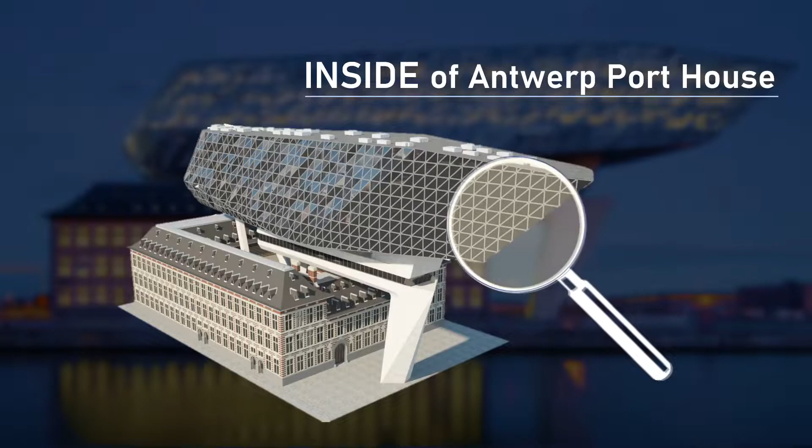In today's video, we will take a closer look inside Antwerp Port House. We will understand what is inside the existing building and the newly added structure that floats above, and also how the existing building was reformed to its current form.

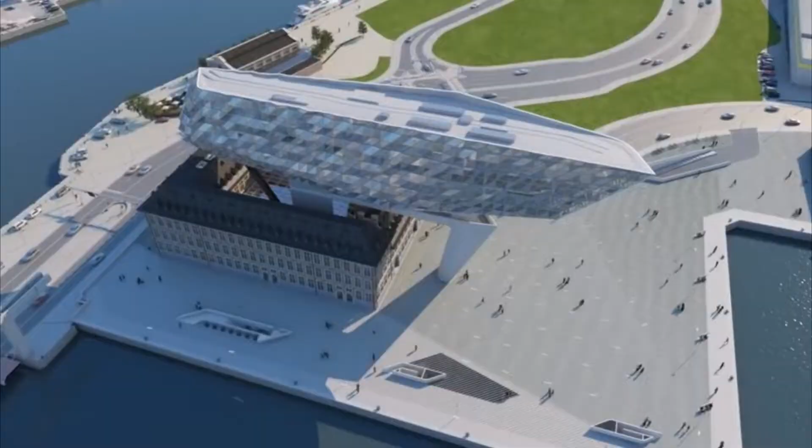Before we go over the interior of Antwerp Port House, let's have a short look at its aesthetic view. We were lucky enough to find a resource that shows great detail of the interior design of Antwerp Port House.

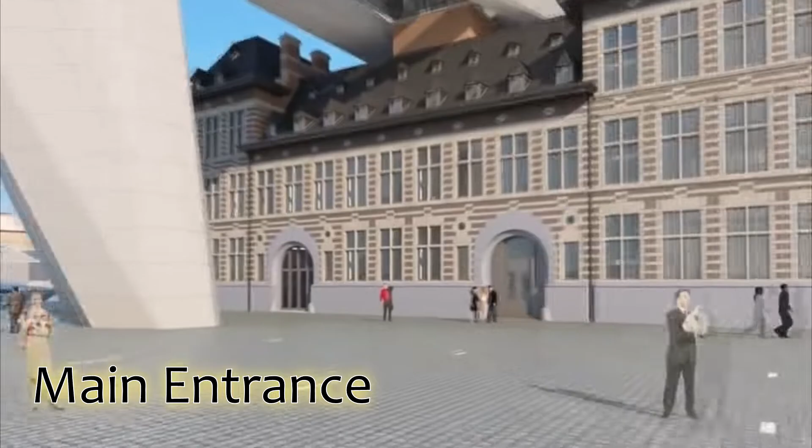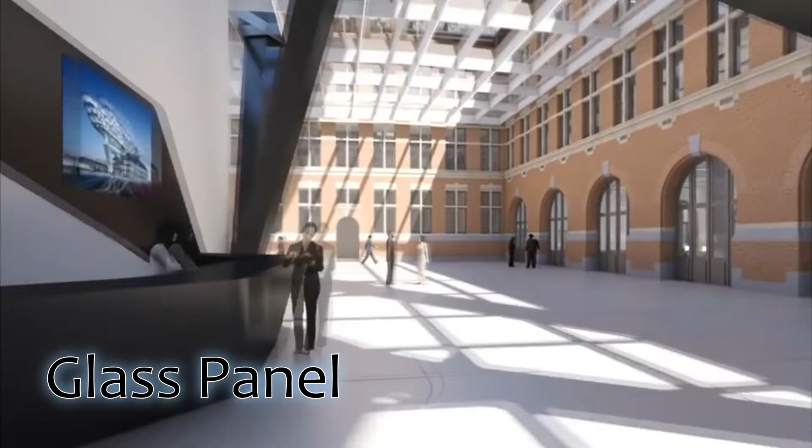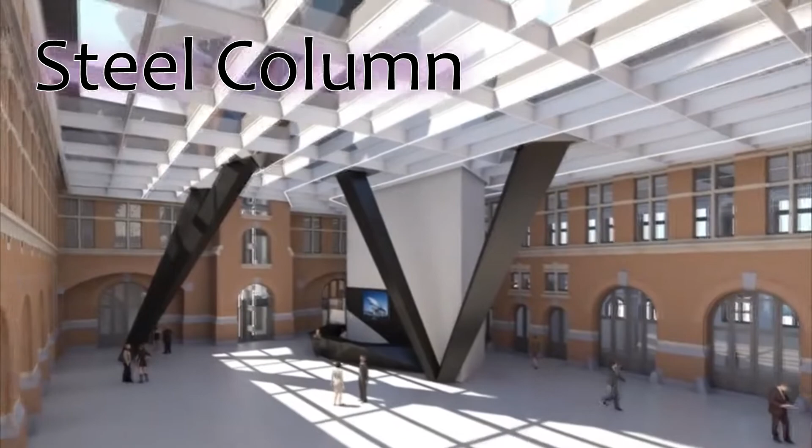As we enter the main entrance of the building, we are looking at the main courtyard that used to be open to the outside atmosphere. However, in the process of adding the new building, a glass panel was constructed above to change the courtyard into an interior element. Furthermore, we can witness the steel column that has an arbitrary quadrilateral shape.

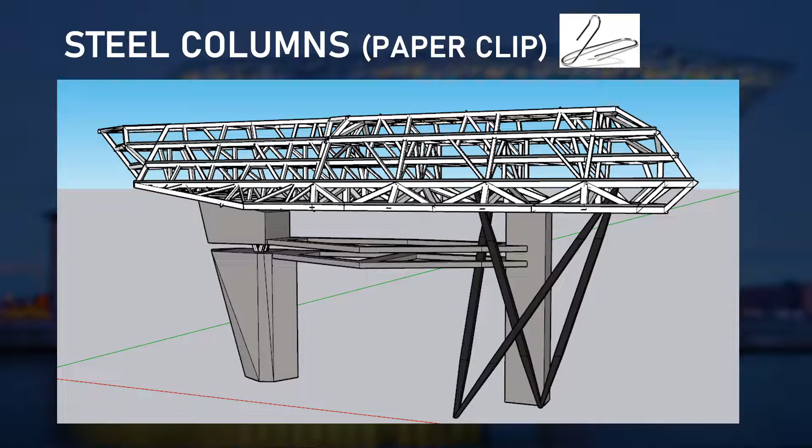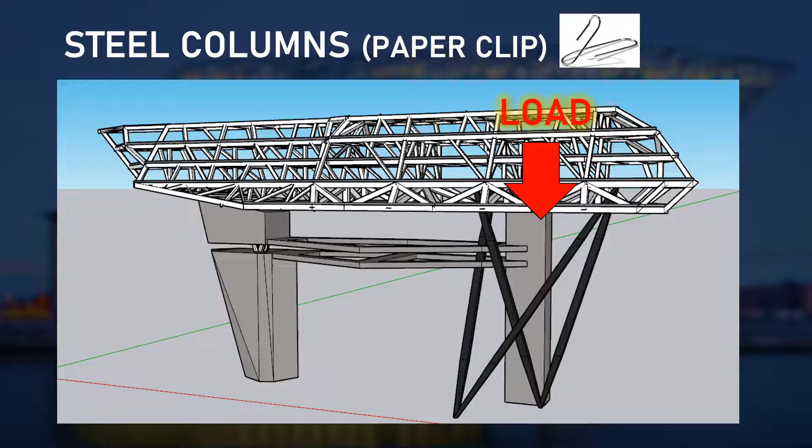These are the steel columns expressed in a 3D model. Their design reference came from a folded paperclip. The purpose of the steel column is to spread the weight to withstand the large amount of weight from the main superstructure. Furthermore, it provides lateral stabilization against wind pressure, as the site condition includes strong wind forces.

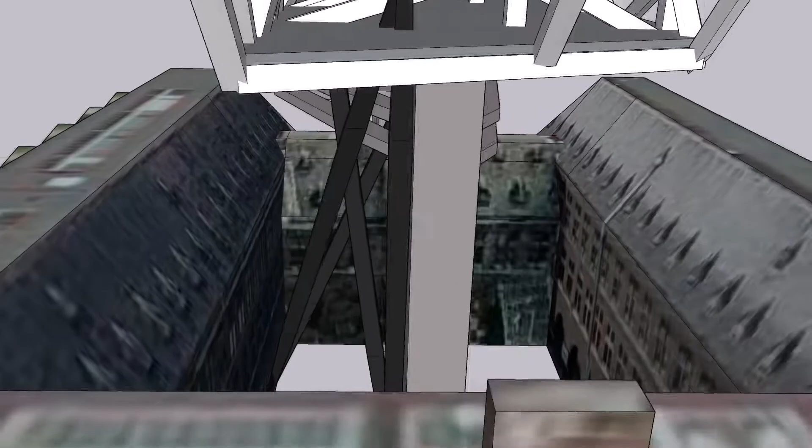As the architects wished that the columns seem to continue, the steel columns leave from the courtyard, go out through the glass panel roof, and connect into the superstructure.

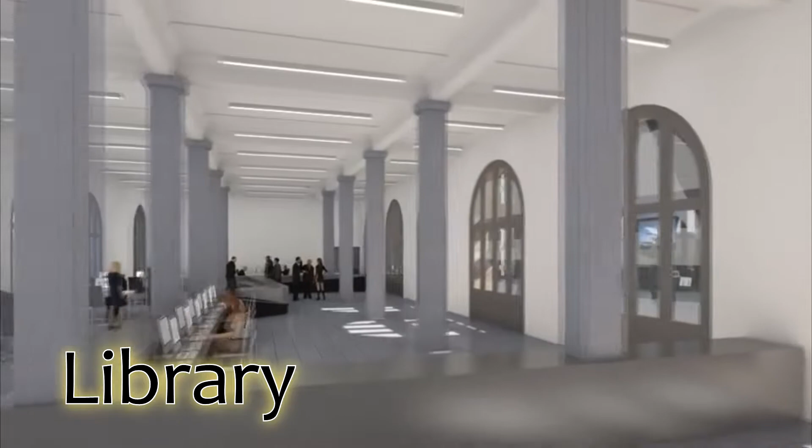If we go deeper into the first floor of the building, we enter the library, where staff or workers could access certain information they need, through online and offline.

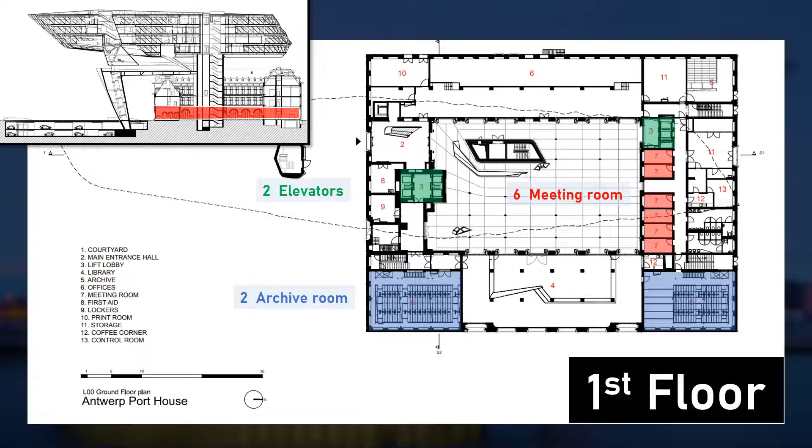This is the first floor plan. It includes 6 meeting rooms, 2 large archive rooms, and 2 elevators, one connecting from the 1st floor to the 8th floor, and another just for the pre-existing building.

We've tried to look for images of other facilities. However, due to the company's policy, there were no other photos available.

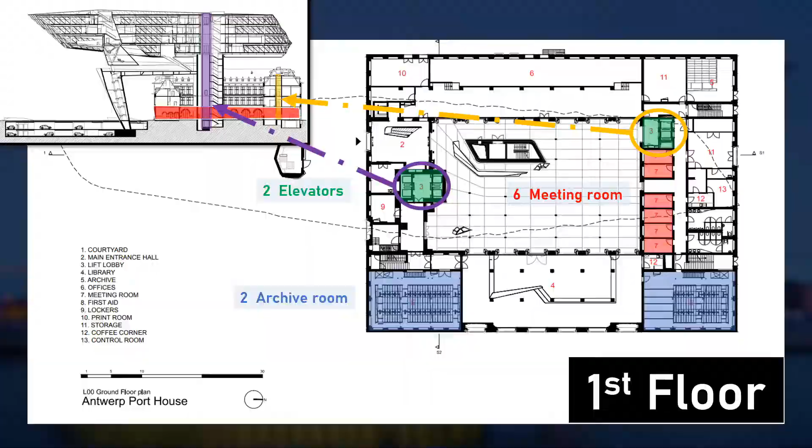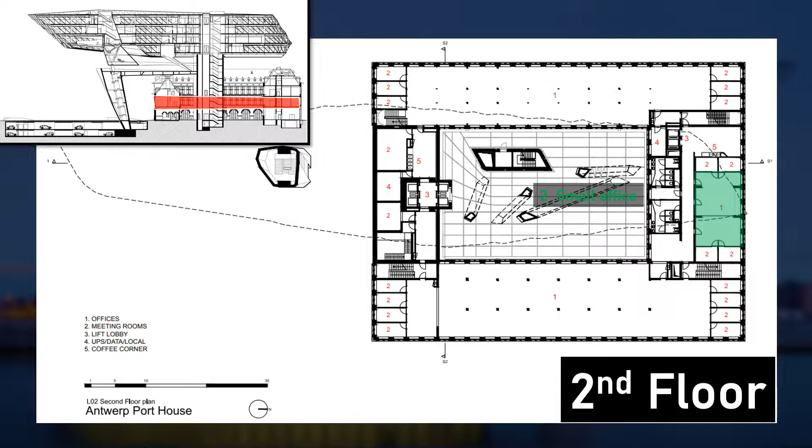This is the 2nd floor plan, and it includes 2 small offices, 2 large open space offices, and 20 meeting rooms.

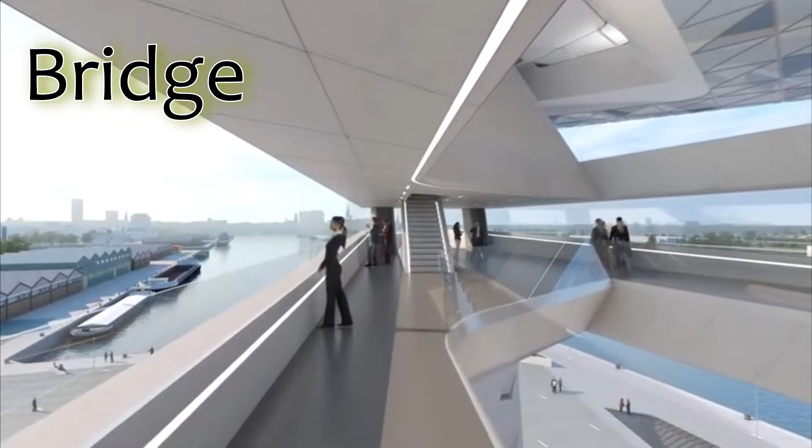Through the lift that connects to the ground level, staff could access the bridge of the concrete pillars. It has a viewing deck where they can take in a view of the whole port.

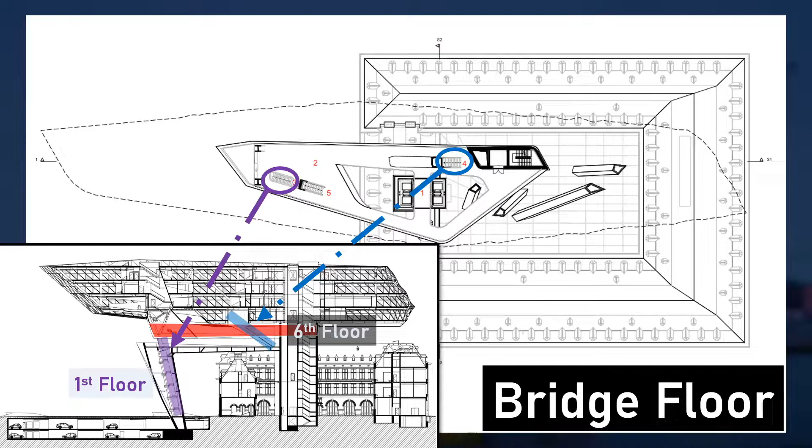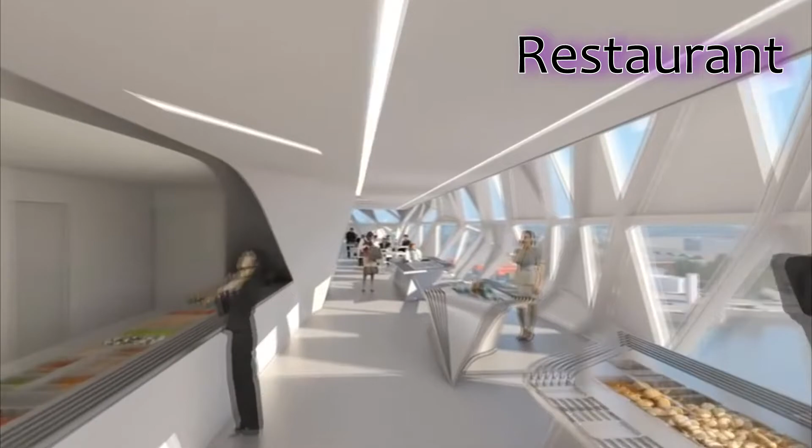On the 6th floor, we are looking at the restaurant and self-service food counter for working staff of the Port of Antwerp. It also includes kitchens to provide many different types of meals.

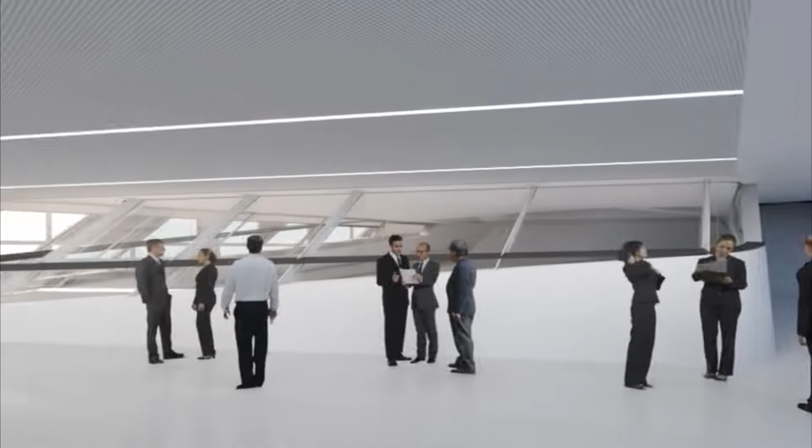Also, there is a foyer, which is an open space for people to socialize.

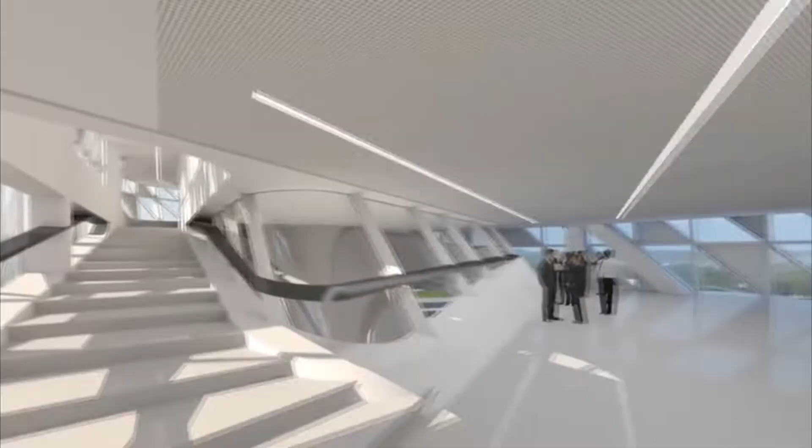This is the auditorium on the 7th floor that is connected to the foyer of the 6th floor.

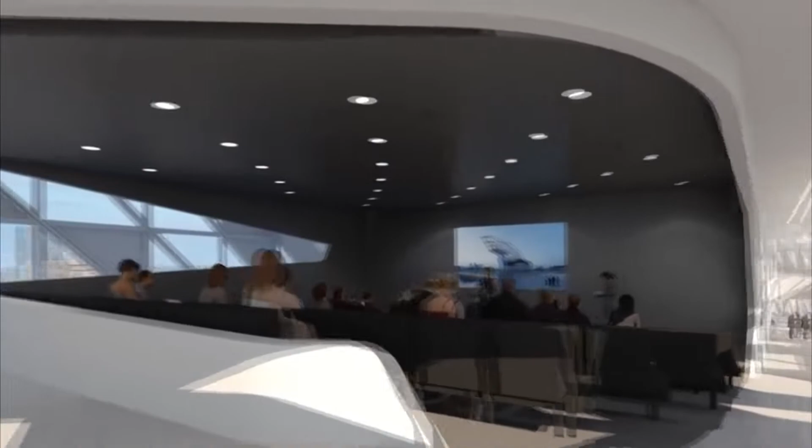This is a space for presentations, and it is currently open to outsiders under a renting service.

This is the office space of the 7th floor, and it is identical to the 8th floor. Each floor is composed of open space where staff could freely use each desk with electronic devices for their work.

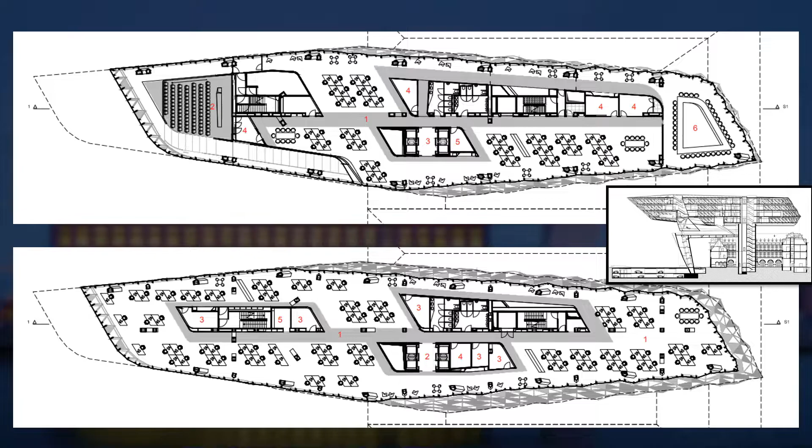These are the floor plans of the 7th and 8th floor. As you can see in the planning, there is open office space and 5 meeting rooms on each floor.

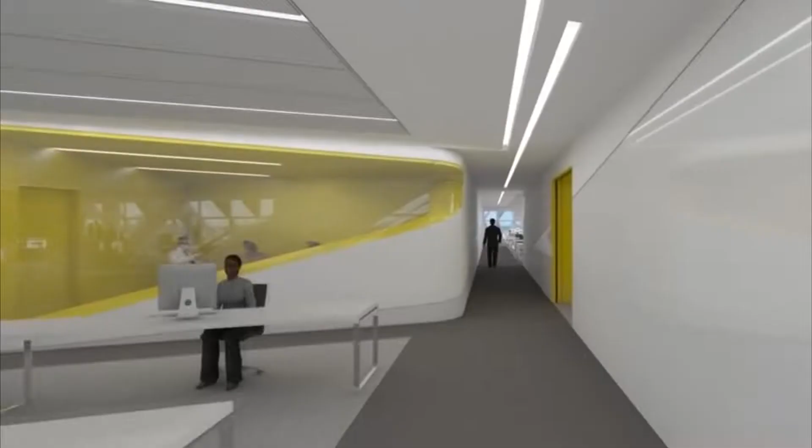But the difference between the 7th and 8th floor is that the 7th floor includes a large boardroom where big meetings take place.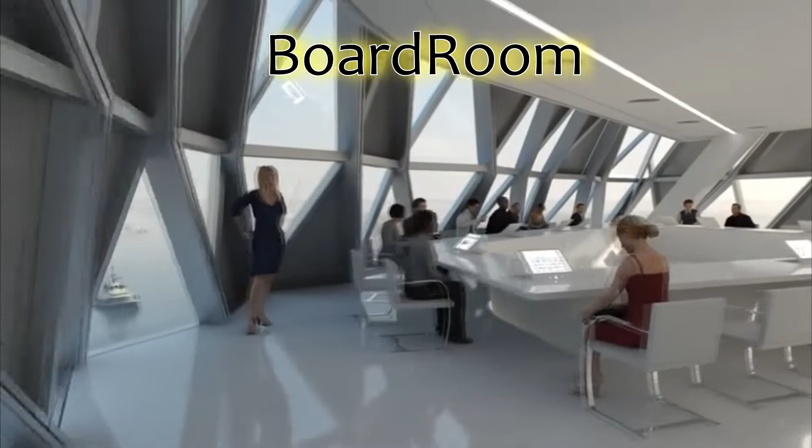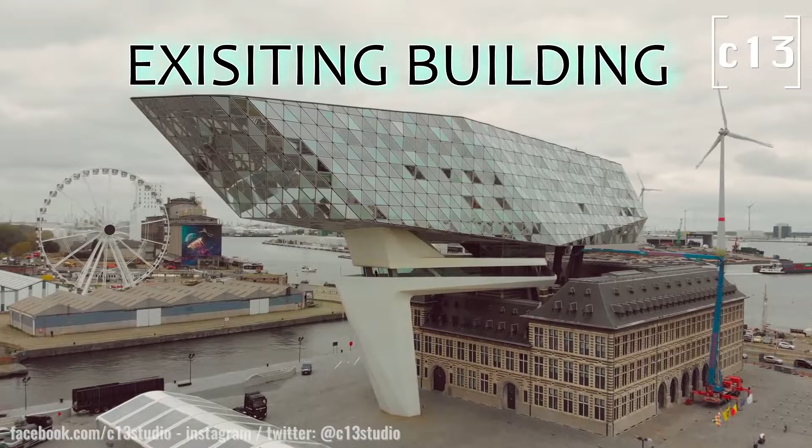Until now, we went over the interior of Antwerp Port House. Now we will go over how the pre-existing building was preserved and remodeled for the new office of Port of Antwerp. And now I'll introduce you to the substructure of the Antwerp Port House.

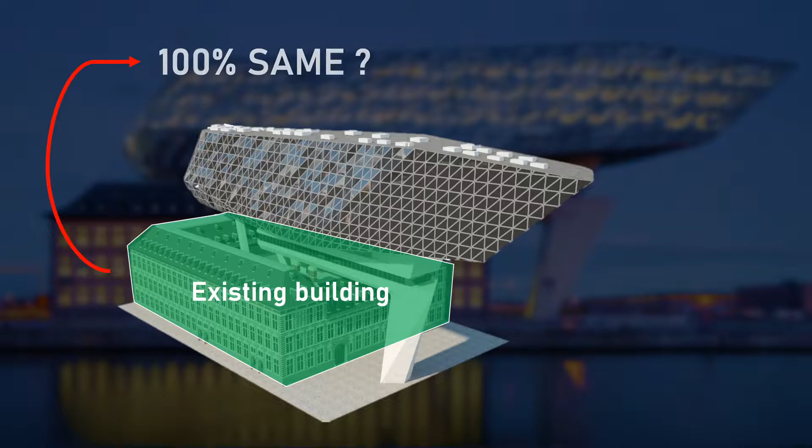So the question is: what did they do to the old fire station when they planned to build a superstructure on it? The old fire station of the Port of Antwerp was built in 1922, planned by Van Mechelen and Van Averbeke after his death.

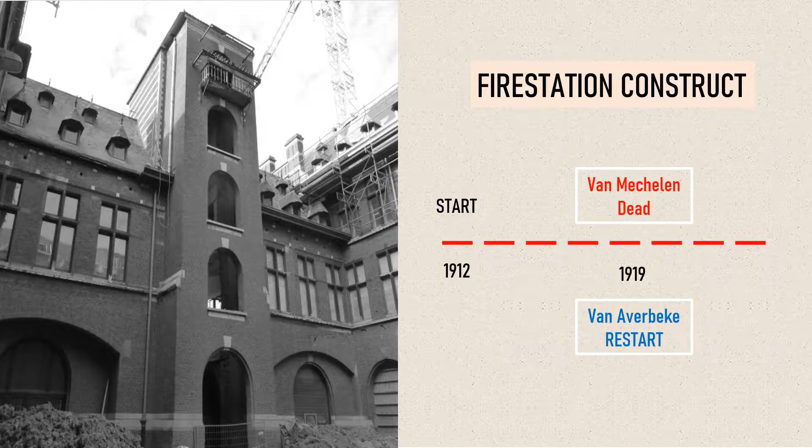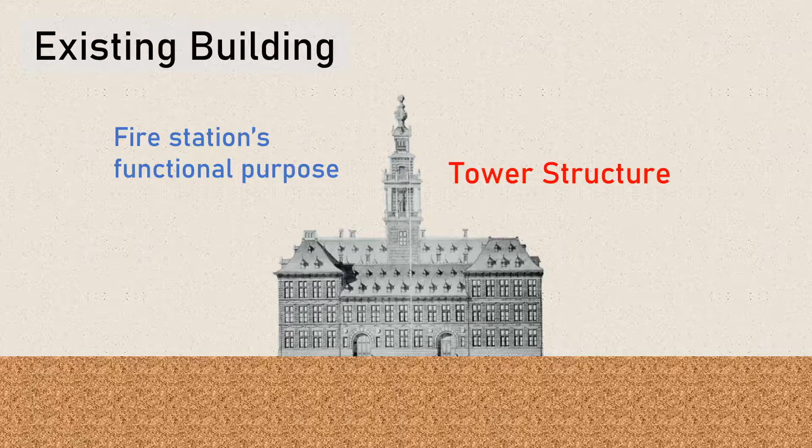At first, it should have included a tower structure for the functional purpose of the fire station, but the decorated spire was never completely built because of swampy surfaces and a lack of supportability.

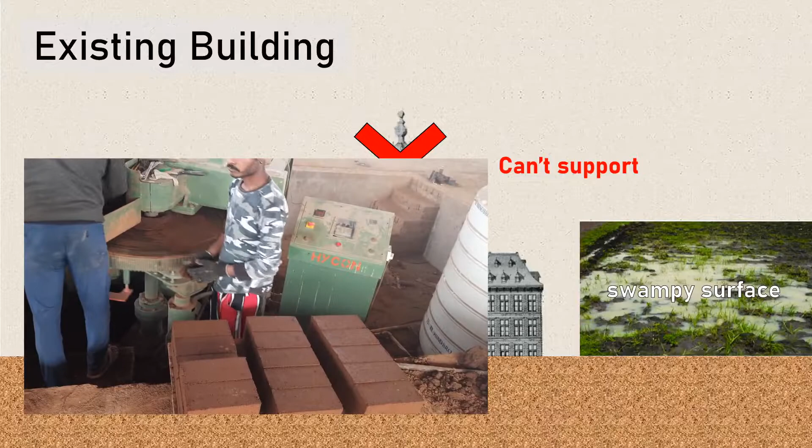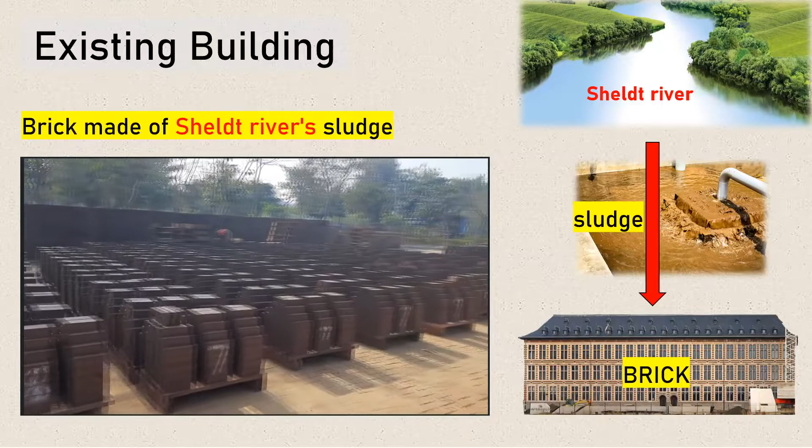The geographical feature, being close to the river, made it possible to easily provide sludge, and therefore the structure was built with brick made of Scheldt River sludge.

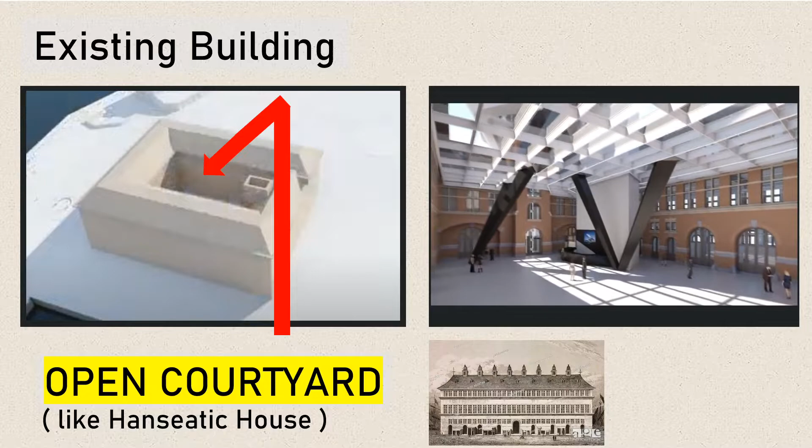And the last thing we should pay attention to is the open courtyard. Just like other Hanseatic houses, the fire station included an open courtyard, and this space was used to dry and test the hoses when the structure worked as a fire station.

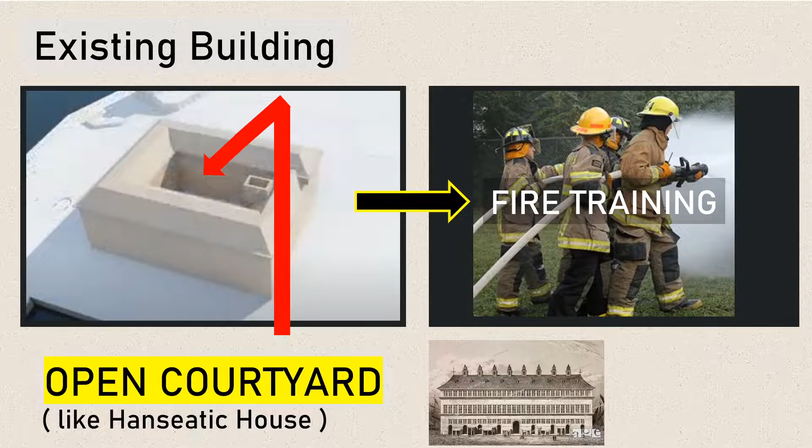They had to restore and repurpose the fire station into the office building to meet safety and capacity requirements at once.

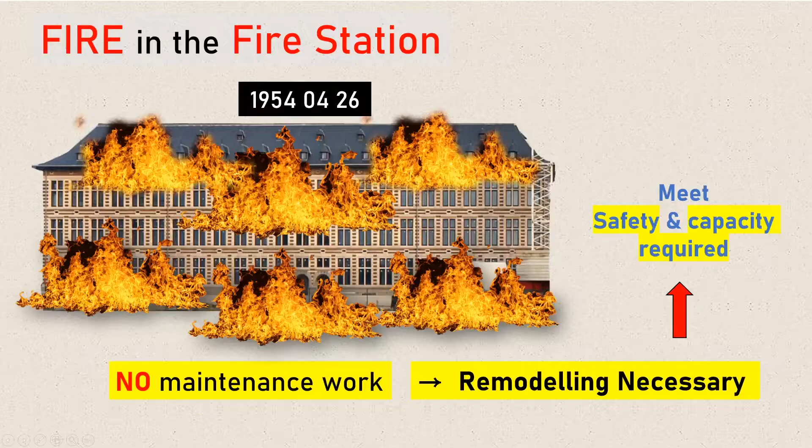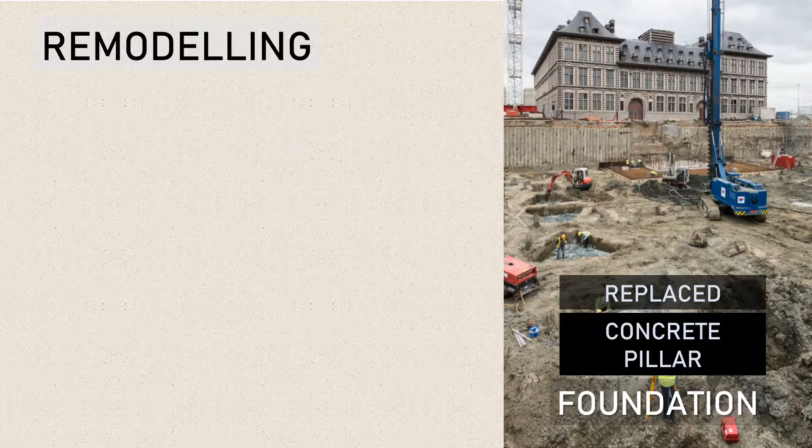When the foundation process proceeded and the soil was excavated on site, concrete pillars and chimneys were replaced. They also rebuilt windows with wood delivered from Canada.

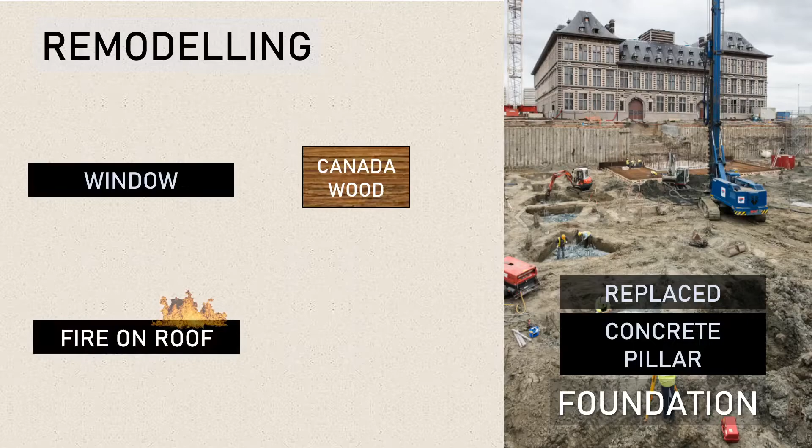Because the fire accident burnt down the wooden roof, it was also a target of the restoration. The replaced roof was concrete, and therefore we can only see the original wooden roof, which avoided the fire, on the south side.

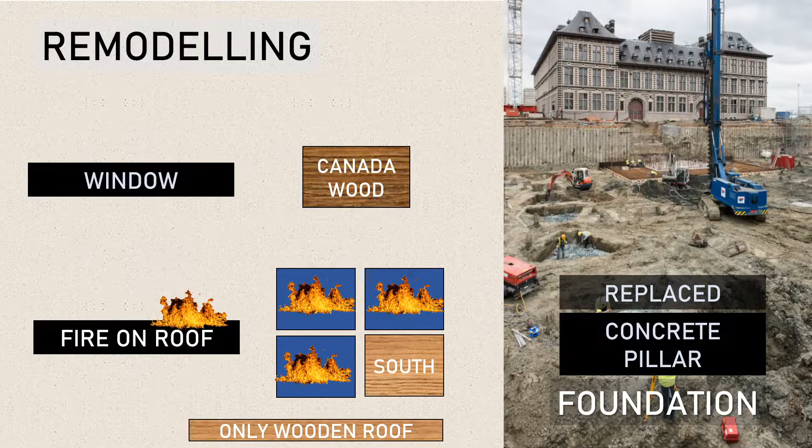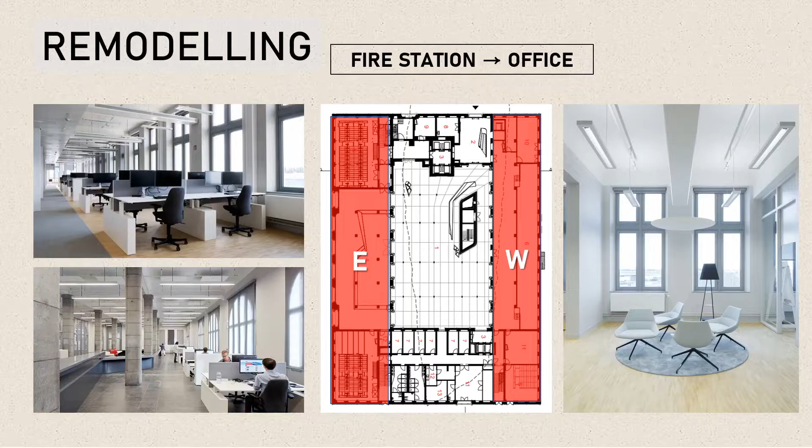After the structure was restored, the fire station changed into an office. They repurposed the east and west sides of the building as office space. The open courtyard became the link between the substructure and superstructure.

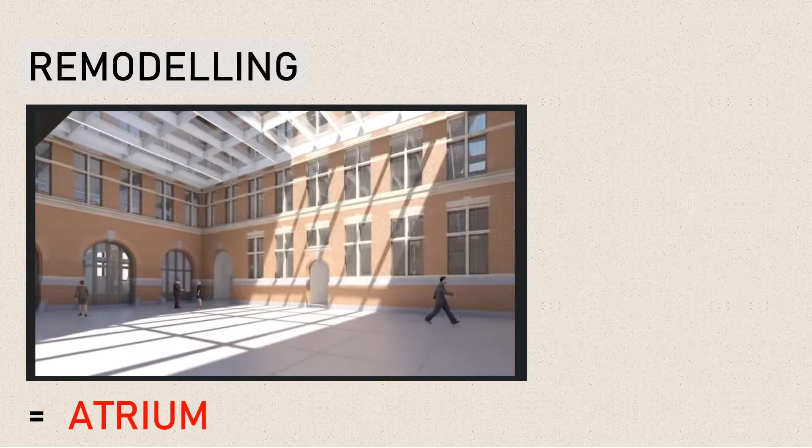Steel frames for the glass panels were welded, and glass stone was applied to the courtyard, and now we call this place the atrium.